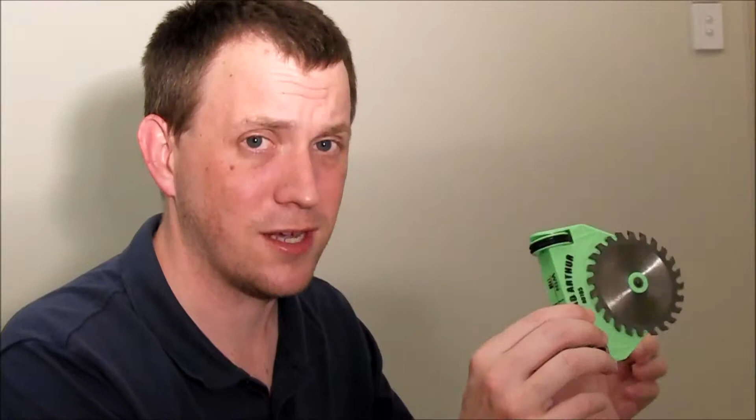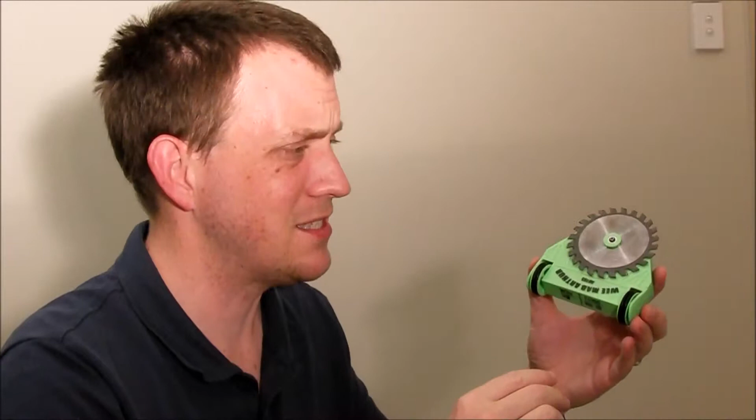With the previous versions, as you can see, they tend to rip themselves in half. There we go, see, they rip themselves in half. The main reason for this is that I've got a really heavy saw blade on here and I have no weight left inside the robot to actually do a chassis. I think this chassis weighs about 23 grams.

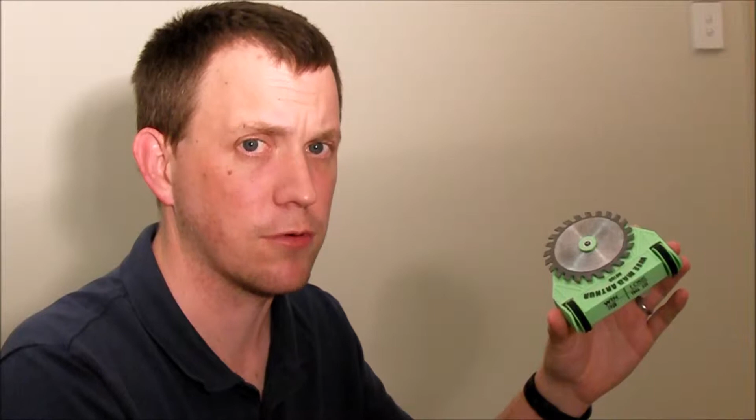So what I want to do is take all the electronics out and replace them with the dual channel speed controller that I've been buying for my other robots and put it in here to try to reduce all this down into a much smaller package.

Then I can have a smaller chassis and put a base plate on here which will strengthen up the whole thing, because at the moment, it's a bit hard to see, but it is flexing even before it hits something, and the blade is hitting the top of the robot, and it's amazing this thing hasn't exploded. So I need to rebuild this chassis and try to make it stronger with some new electronics in it, and we'll see how that goes.

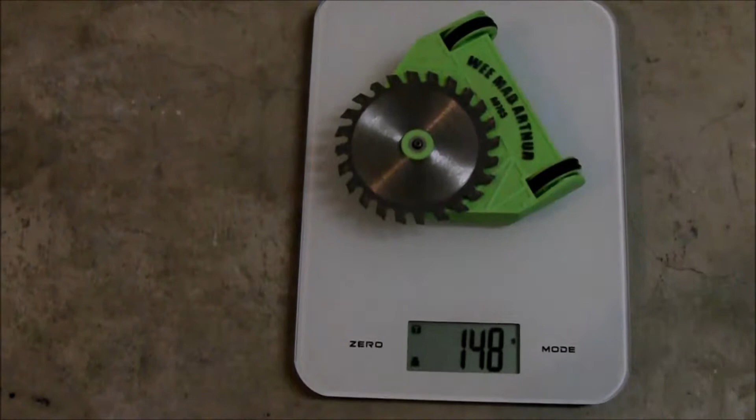Okay, let's see how heavy it currently weighs. 148 grams. So if we leave it as is, I've got 2 grams to put on a base plate. Ooh, no good. Okay, so yep, previous chassis weighed 22 grams, so I was wrong by 1 gram. So we'll see how much weight is in the robot once we change the speed controller.

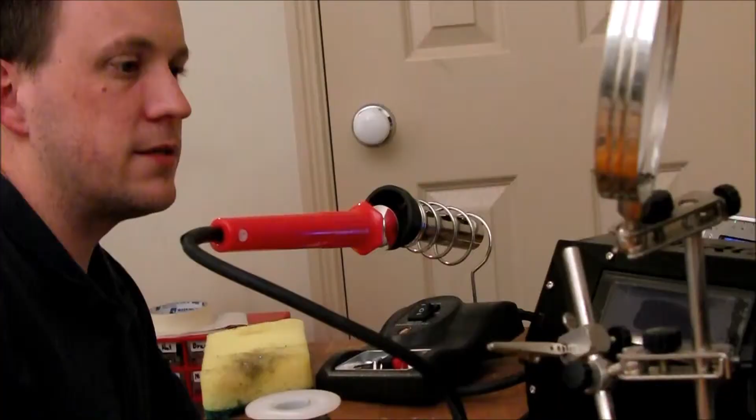So the first thing I need to do is remove the speed controllers from the old robot and see how much weight I've got to play with when I put in the new speed controller. So I'll take these out and put in the new speed controller and see how much I've got.

First thing to do is to rip out the battery, which is only held in by a bit of hot glue. Then we take out the receiver, which again, a bit of hot glue. Here it comes. Yeah, receiver with no case. And then to try to remove the speed controllers, which actually require a bit of soldering to get them out, because they're soldered into the weapon speed controller as well.

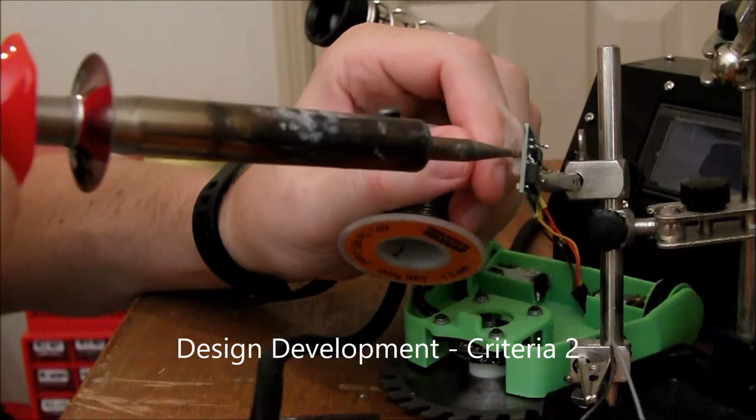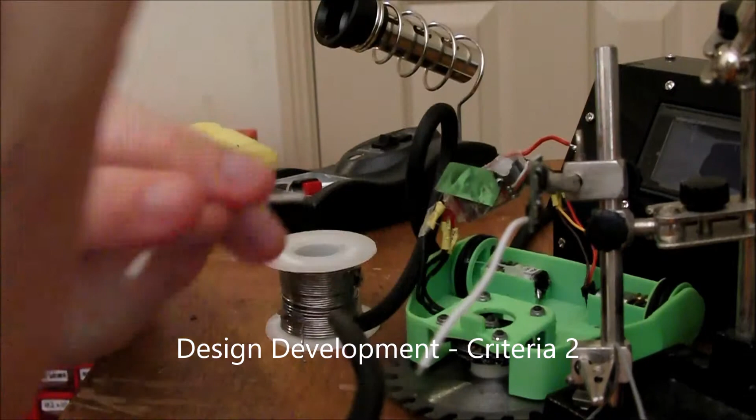And as you can see, the two speed controllers are a complete mess with all the wires. They in total weigh 15 grams. Now to put in the new speed controller, which I solder in. These things come without any wires actually attached, so you have to solder them yourself, which is kind of a pain. And it would be handy if they came pre-soldered.

Okay, now to check the weight with the new speed controller soldered in. 139. So this new speed controller only saves around about 10 grams of weight. So we've got 11 grams to add a base plate and strengthen it up. Now let's see what happens when I draw it on the computer.

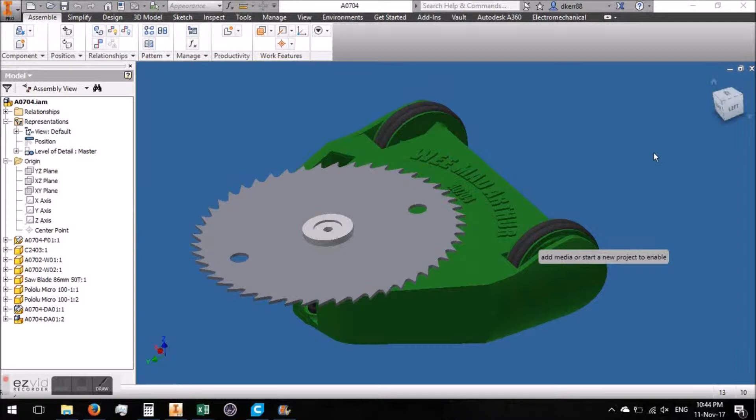Here's the 3D model for version 4 of the robot. I didn't actually save version 5 since it just had a few little raised ridges on the top to try to stop cracks from propagating through the model. It also has a hole in the top for the receiver to fit, which I removed. Now the first thing I want to change is to increase the gap between the saw blade and the chassis to try to stop the saw blade from hitting the chassis when it bends.

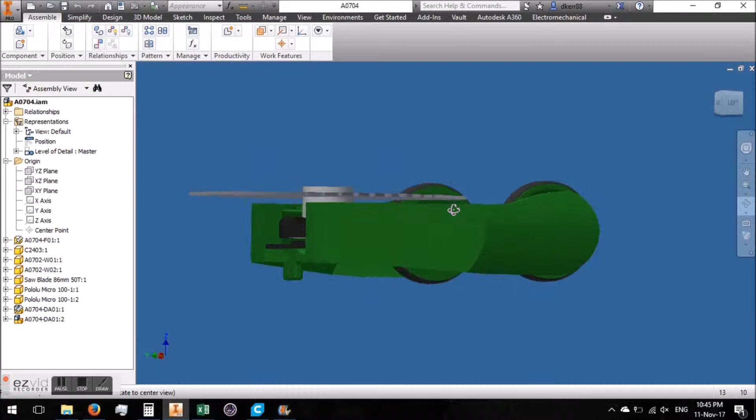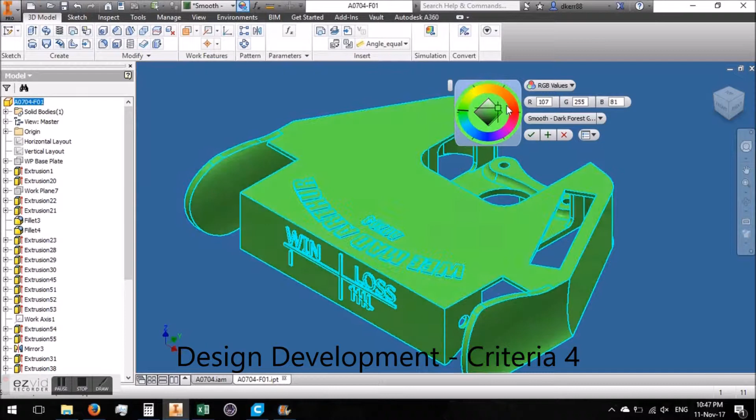So I'll start by opening up the chassis model and then saving a new copy of it so we can make a new revision. We'll be on to revision 6 for this robot. So here we go, create a new folder, new chassis number, and change the colour so it matches the 3D printing, and remove the hole for the receiver.

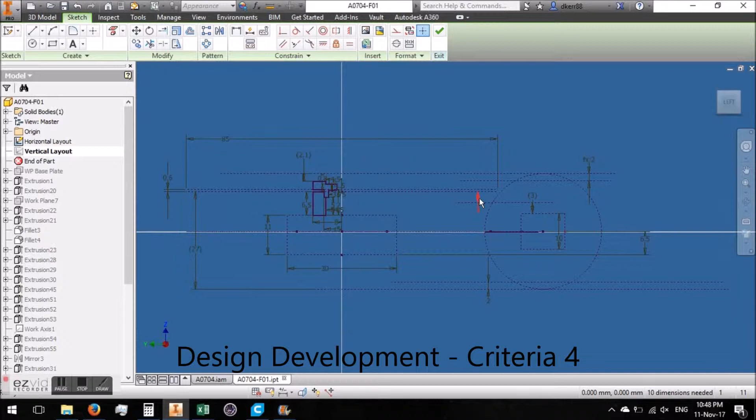Now when I first start drawing my robots, I start with a vertical and a horizontal layout sketch. These are just 2 sketches that don't actually get used in the model, but they show me where all the parts are going to go. So this is the vertical layout, which has all the dimensions for where the wheels and the motor are going to go. So I just need to adjust that so I can change the height of the motor compared to the chassis, which should update the rest of the model.

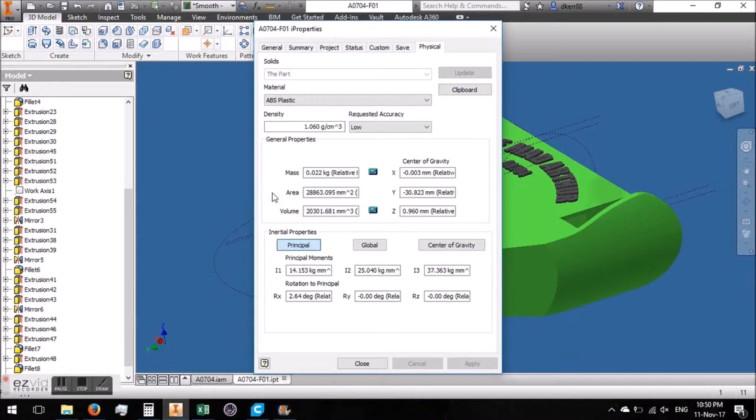Now before I get too much into the editing of the model, I better check how much this thing actually weighs according to Inventor. Now it's pretty accurate, so according to this it actually weighs 22 grams, which is the same as what we measured on the scales earlier, so I'll pretty much take this as the actual weight when it's finished.

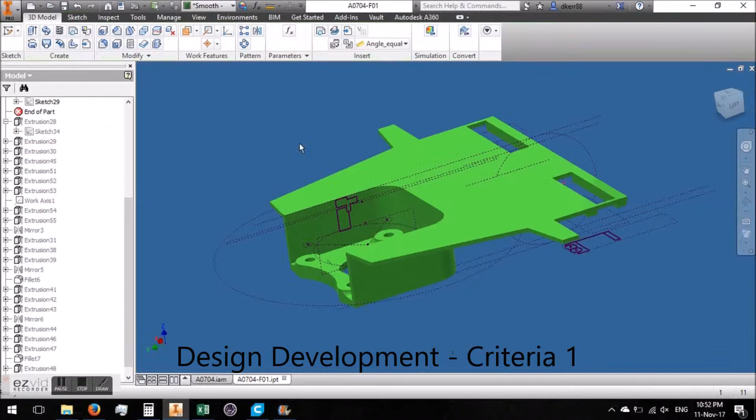Now the next step is to change the shape of the robot. Because the new speed controller takes up a lot less room inside the robot, I can make the chassis a bit smaller. So what I want to do is try to narrow the front of the robot a little bit, which is going to change what the robot actually looks like. So I'm just updating the sketch here, trying to keep the wheel guards where they are and make the chassis narrower at the front. This is going to add an extra little extrusion in here, which I'm going to have to add in right now.

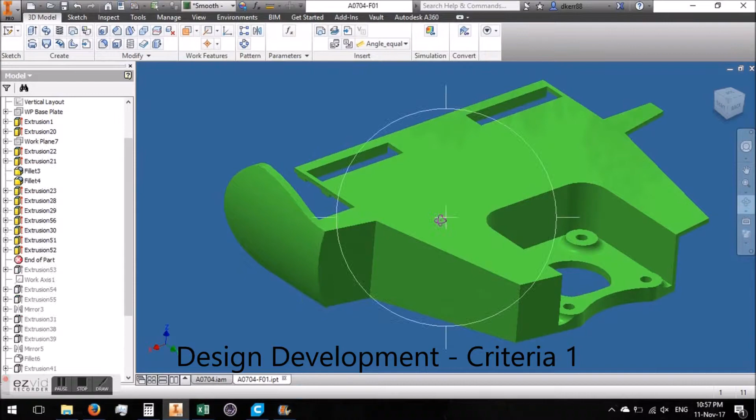There it is. Now most of the robot is updating itself automatically, which is pretty handy, but these curved wheel guards have a few issues, so there we go. We'll just update those, make sure the constraints are correct. Beautiful. And then we can just pattern it over the other side, and most of it's already updated for us. Checking the weight, and we have lost 1 gram. So, well, it's not much, but basically now we have an extra 14 grams to play with.

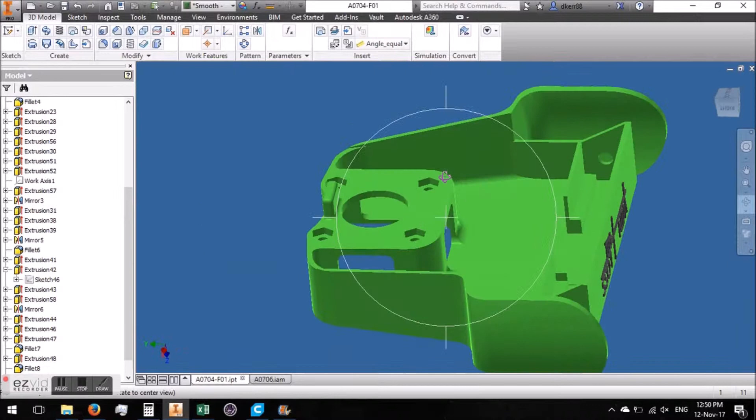Next step is to add the mounts for the base plate. So I usually use 4 screw holes, 2 at the front, 2 at the back. So just extrude those through and pattern them onto the other side and fillet them out so they look good. Beautiful.

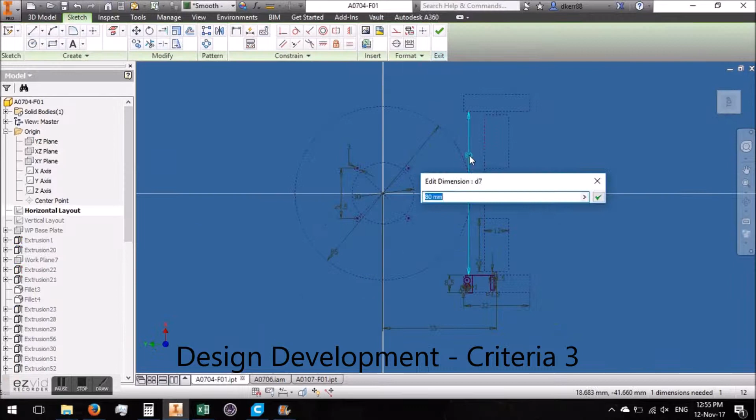And I need to add in a top switch, so we'll copy the dimensions from Big Yarn and make a switch exactly the same. Now the switch didn't quite fit beside the text, so I actually made the chassis an extra 5mm wider. No real reason really, but just because I can. And then update the text and the wins and losses from the last competition, which usually takes longer than drawing most other things.

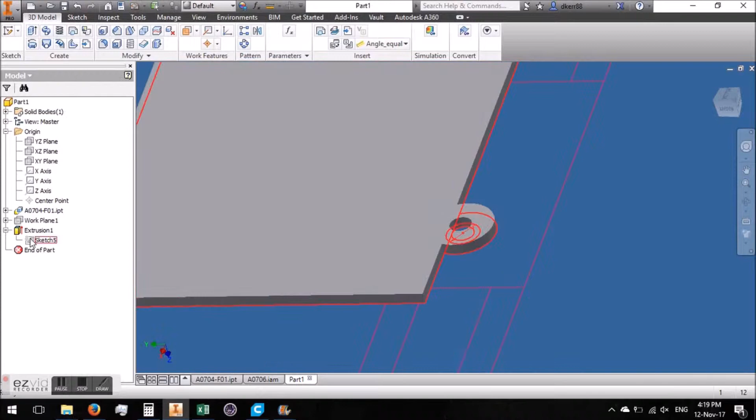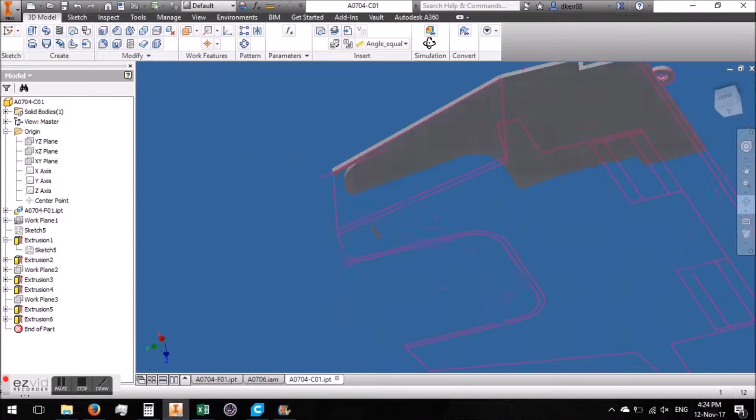And now I'm copying the sketches through from the main model into a new model to create the base plate. So I copy through the sketches for the mounts and then derive those through and then project off them. That way I know that the base plate will match perfectly. I just need to put a bit of a step in the base plate so it actually goes around the chassis here, and then angle it down to the front so it matches. And add a recess so that I can still see the bolt holes for the weapon motor.

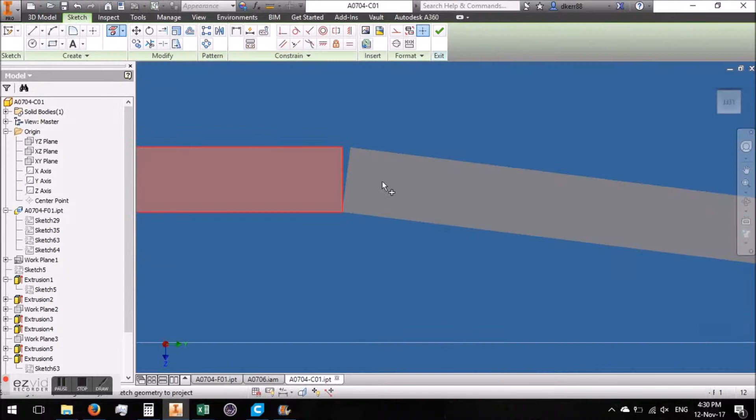Now I'm only drawing half of the base plate at the moment, and I'll just pattern it over the other side just to basically be lazy and save some work. And then add in a little gap there because that didn't quite extrude through properly, and that looks good. Now these little lugs here are actually designed to press the motors into place, so I don't need to glue the motors in anymore. Basically the base plate holds them in place, and fillet it out to make it look good. Awesome.

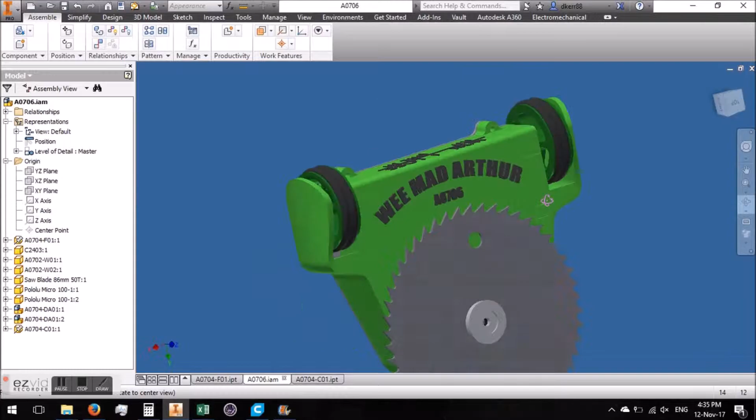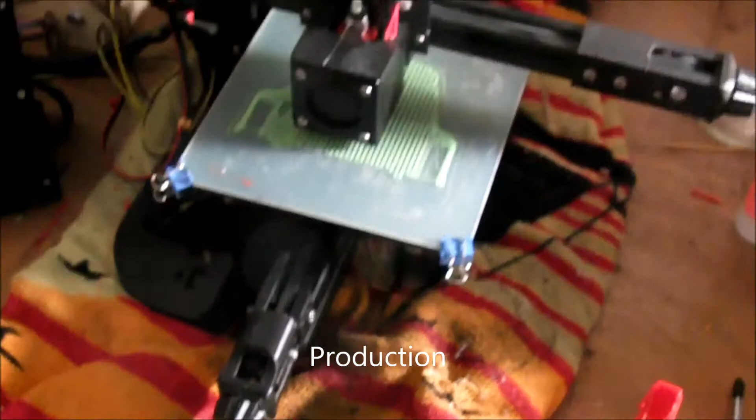There's Cura for the models, 14.5 hours for the main chassis, and then the base plate, which is about 3.5 hours. Quite a lot of support. Now printing the cover. There's no raft on this one, so just printing straight onto the bed with the supports. I think it'll be fine. Yeah, it does look pretty good. And there it is. And now printing the main chassis. Yep, 14 hours later, and we're going to have a finished thing. There it is. Awesome.

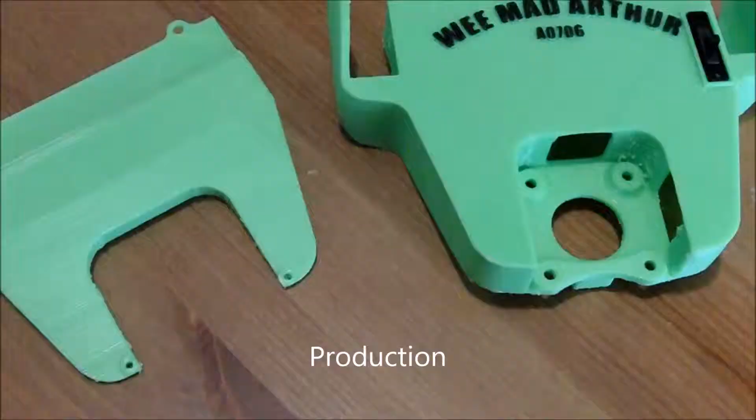Here's the finished prints after they've been cleaned up. There's the old one. I've already put the switch in just to see if it fits. There it is. Now we just need to switch the electronics over.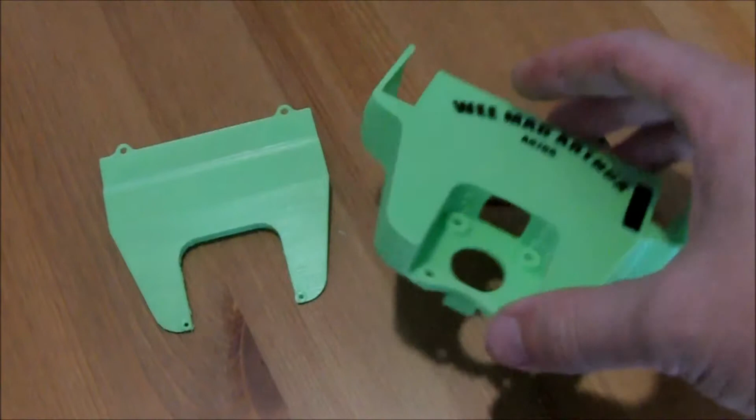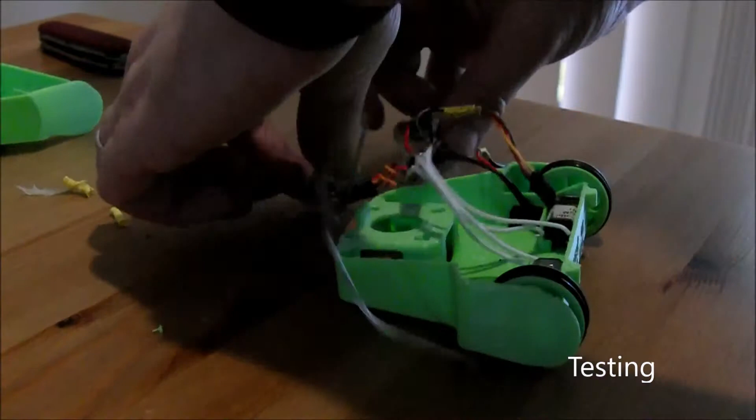Now I need to explain, this is where I discovered quite a big problem. The brand new speed controller that I got is actually dead. When I try to power it up after this, the receiver powers up and the lights all blink, but the robot doesn't actually drive. Now I discussed this with the guys who sold me the speed controller, and they admitted that they gave me a dead one and they gave me a refund.

But the replacement speed controller that I bought did not arrive before the competition. That means that I had to compete with the old robot, which was not fun at all. Because it turns out the old robot can't actually drive, particularly upside down.

This is because the weapon axle was touching the ground and was basically acting as a wheel that was driving the robot sideways. I could get some control by making the robot turn, which actually made the robot drive sideways, but it's kind of luck if I even managed to hit the other robot. And I was basically just pretending I had control over it. It's kind of lucky I even won some fights.

When the robot was this way up, the battery plug would actually lift the wheels off the ground, which would make control even worse. The robot would basically just spin on the spot and I couldn't drive forward to get off the pit. Also, the little clamp that held the saw blade onto the motor was slipping, and the motor would spin without spinning the saw blade.

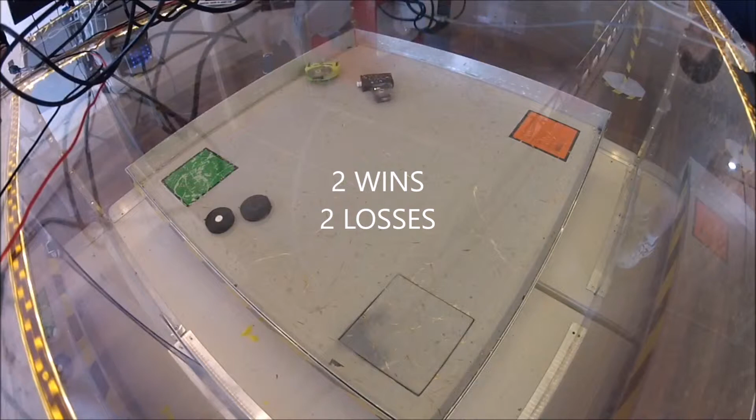Basically, all I could do was really just turn the robot and hope that I could hit them. And it was kind of really luck that I even managed to win this fight too. No idea. Basically, the robot was undrivable and was no fun to even play with. It really needs that base plate to stop the electronics from touching the ground and allowing the robot to actually drive.

The robot also took some damage in the fight against Tickety Boo, which was these chips in the back, as well as some damage to the wheels. Also, the saw blade was rubbing against the top of the robot, which was preventing it from spinning up terribly well.

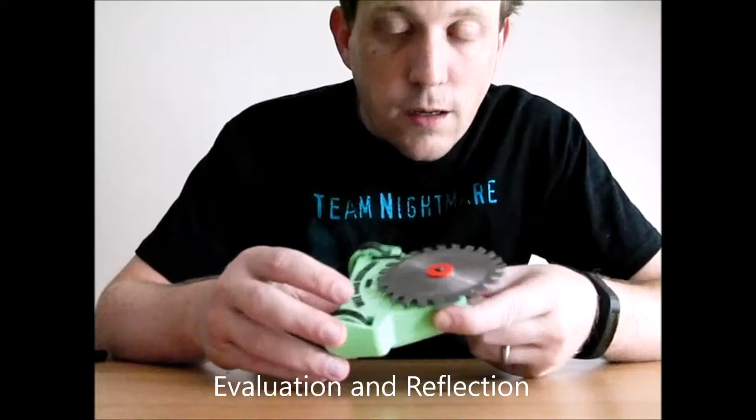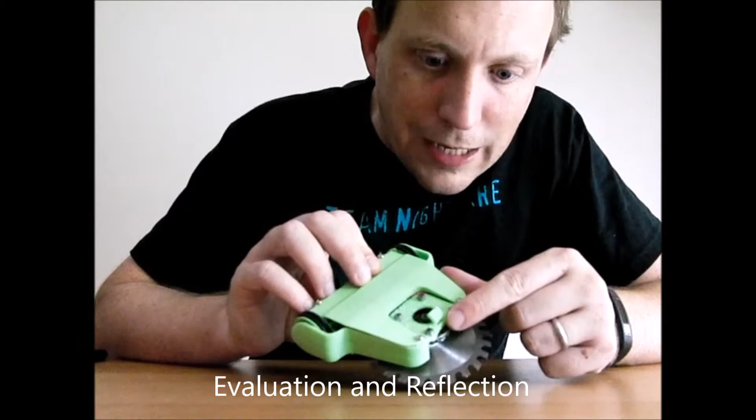Okay, so I've got Mad Arthur put back together again with the new speed controller that just arrived, and the thing now drives beautifully, which is great. However, there's been some more hiccups. One of the first was I knocked the little lug off the front that holds the nose off the ground while it's driving. It hit one of the bumps in the tiles and snapped off, so I'm going to have to glue that back on for the moment.

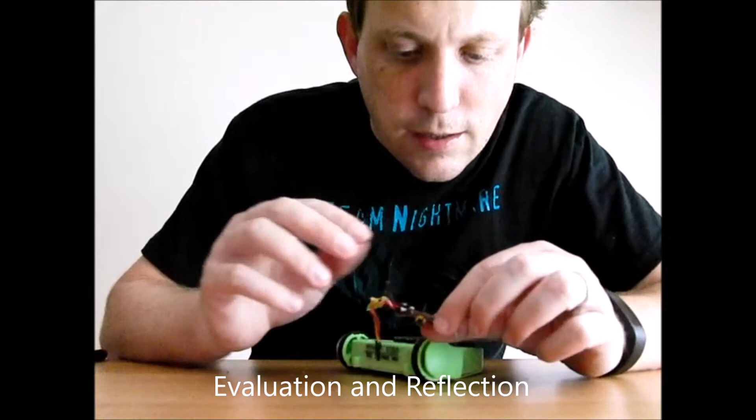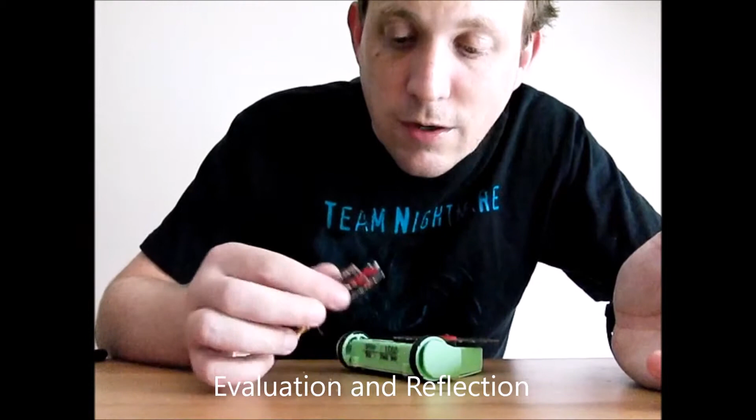Really, I need to reprint the whole chassis and make this little lug here a bit stronger, but I won't really do that at the moment because the other problem is the weapon speed controller had died. I believe that the wires had got frayed and shorted out across the motor terminals. And yeah, when I was powering it up, it was making quieter and quieter beeping noises and wouldn't turn the motor, and now it doesn't even beep. So yeah, we lost the weapon speed controller.

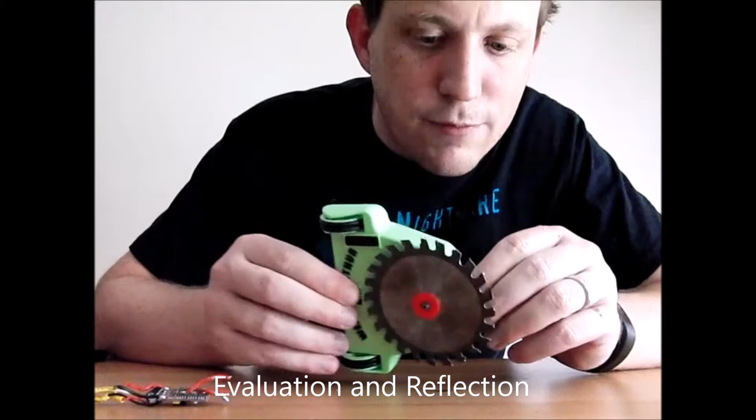So this thing is having really bad luck with speed controllers. The drive motor speed controller died straight out of the box, and now the weapon speed controller has died. So I've got this thing driving beautifully now, but I can't spin up at all to give it a proper test. Get out of it.

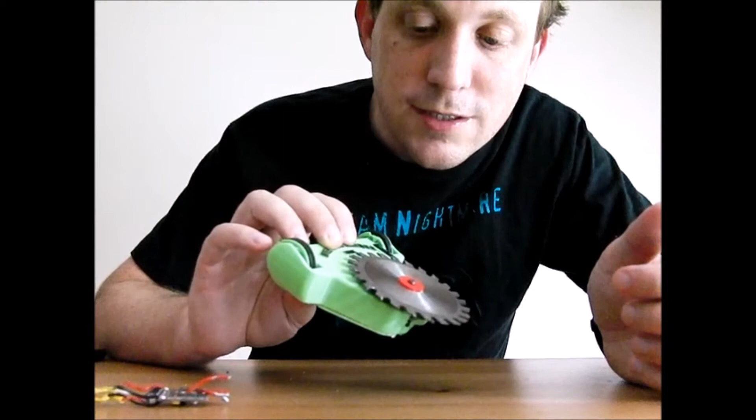At the moment I'm attempting to put this thing on the shelf and take the speed controllers and motors and everything out of it and put it into a different robot, one that doesn't have a spinner on the front, just because I'm getting kind of frustrated with this one. I do want to take it off the shelf because my first Antweight robot was a green horizontal spinner like this. So I do kind of like horizontal spinners, and I really wish I could get one going one day. But at the moment, just so much frustration with this thing.

So I'll order a new speed controller online, and when it arrives, I'll put it back in here. But until then, we might build a new robot.